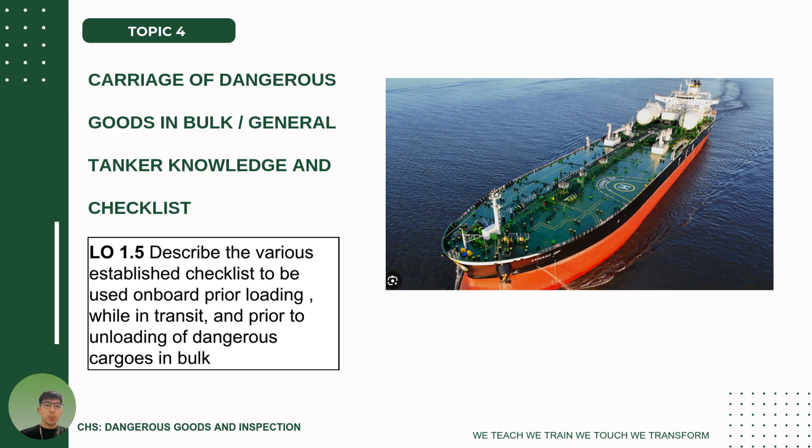So for topic 4, we have the carriage of dangerous goods in bulk, or general cargo tanker knowledge, as well as the checklist.

For general tanker knowledge, as we all know, we have different types of vessels. For each type of vessel, we also have different subcategories. For example, a tanker vessel has its own subcategories - it's not just one single tanker vessel. The types of tanker vessels are listed here.

Before that, we're going to have an overview. A tanker ship is a vessel designed to transport liquid or gas cargo in bulk. Unlike container ships, tankers carry their cargo directly inside large tanks.

Basically, we have a tank inside our vessel. Unlike cargo containers which we carry outside the port and then load onto the vessel, the tanker has built-in tanks on the vessel. These liquids may include crude oil, fuel oil, chemicals, and liquefied gases. Because of the hazardous nature of this cargo, tanker operations require strict safety measures and trained personnel. That's why the salary of seafarers working on tankers is much higher.

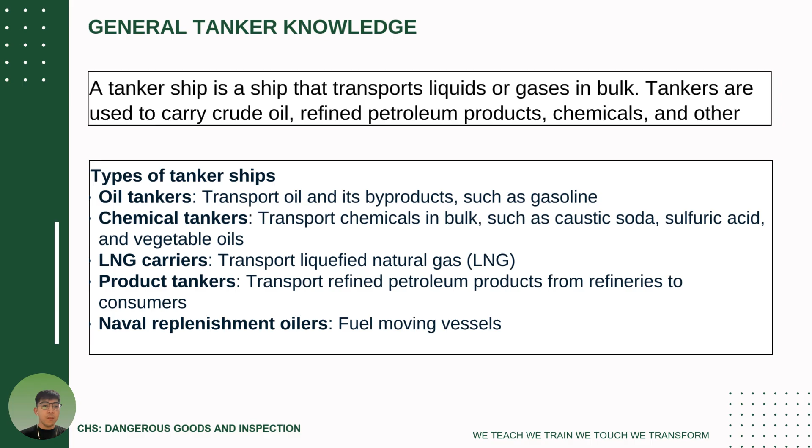Because the risk to lives is higher, and also the trainings required are numerous. So we have oil tankers, which transport oil by-products such as gasoline. We also have chemical tankers, which transport chemicals in bulk such as caustic soda, sulfuric acid, and vegetable oil - meaning chemicals that are mixed. Then we have gas tankers - not only liquefied natural gas, but also liquefied petroleum gas. And we have product tankers, which carry refined petroleum products from refineries to consumers, and naval replenishment oilers for fuel moving vessels.

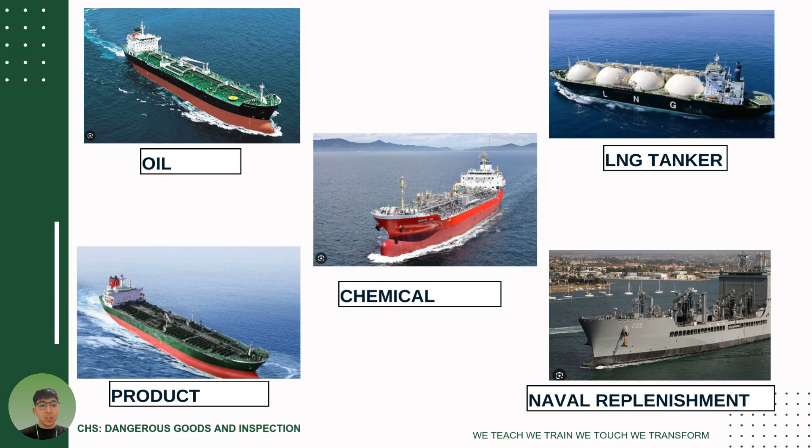They use these pipings, and those pipes are designated to transport cargo from port into our vessel. Then on our vessel, it has built-in containers. That's what we call it - as well as the naval replenishment.

For the terminologies, the first word is sea chest. A sea chest is an opening in the ship's hull. If you notice, there's the ship's hull, and there's an opening in it - that's what we call the sea chest, which allows seawater to enter for cooling. So we use this sea chest to cool down the engine.

So, ballast and firefighting system is protected by a strainer. Why is a strainer installed? To prevent debris.

What are the debris? Things under the sea, like corals and reefs, and marine microorganisms, preventing them from entering inside the hull. Without the sea chest, important systems like engine cooling and fire pumps would not function properly, because they also need a cooling system. This sea chest is the opening for seawater to enter the hull of the vessel.

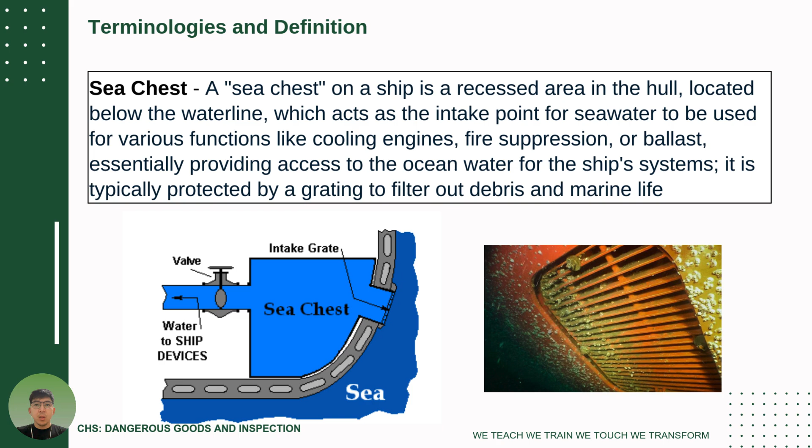Then we have the overboard discharge valve. This allows the water or waste to be discharged from the ship into the sea. This includes the discharge valves from storm valves and overboard globe valves. These valves must always be properly controlled to avoid pollution, and incorrect operation can result in oil spills and/or environmental damage.

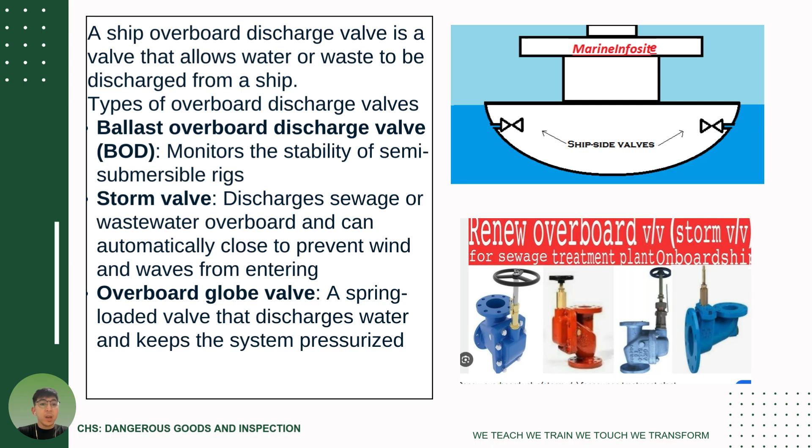Again, these valves are used for opening and closing the switches. You'll see valves like that here in the school, like the ones for the fire hydrants. When you go aboard a ship, especially when you are in a tanker vessel, you'll see many hydrants like that for opening and closing the valves.

Then we have the emergency shutdown device. What is the ESD for? The ESD is a safety system designed to immediately stop the cargo operations.

So when you see something leaking or there's a fire, just press the ESD. In case of emergency, it automatically closes the valves and stops the pumps to prevent spills, fires, or explosion. That's what happens when there's a fire during loading and unloading operations, just press the ESD. And not just fire, but also spills or explosions.

For example, if a cargo hose connected to your vessel coming from the port bursts, you can press the ESD instantly to stop the transfer or stop the operation. Sir, what if there's no advice yet? You don't need to wait for the advice. If you notice that the operation is dangerous because of the accident that happened, just simply press the ESD and inform also the bridge and/or the cargo control, the CCR.

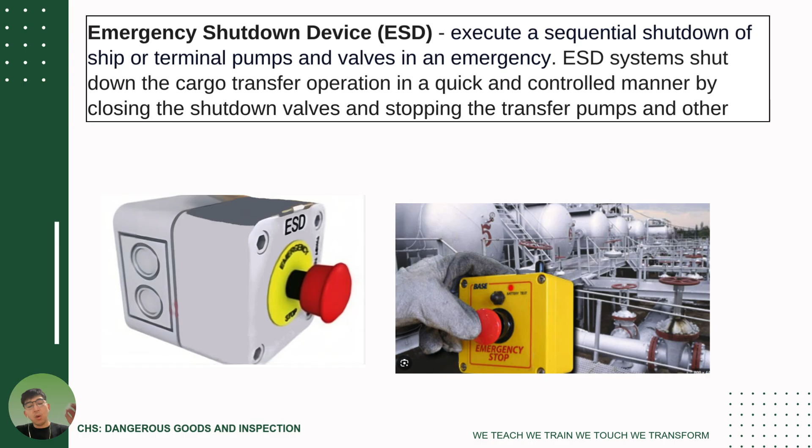That's our main room, the cargo control room. Then we have the tanker manifold valve. What is the tanker manifold valve? When we say manifold, it is the place where the transferring happens.

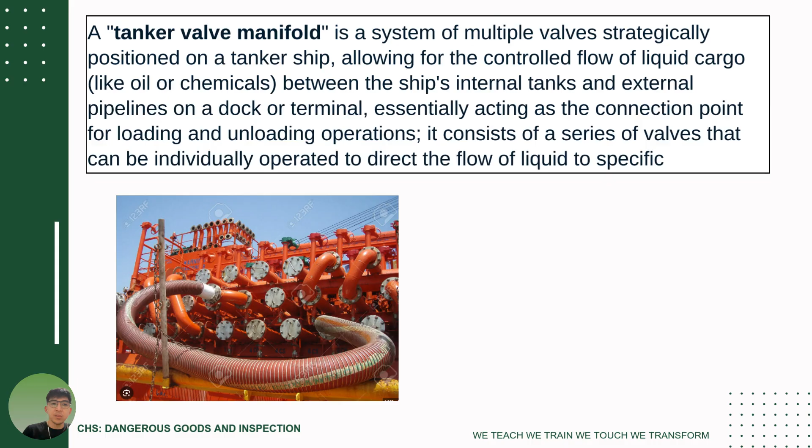Then we have the mast riser. The mast riser controls the vapor pressure inside the cargo tanks. It prevents overpressure and allows the controlled release of vapor.

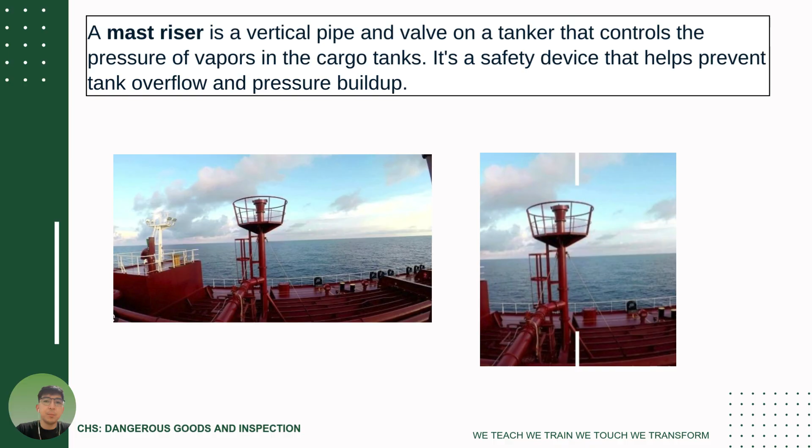Then we have the emergency firewire. We also call this the emergency towing-off pennant. It allows tugboats to quickly pull the vessel away from the port in case of fire or explosion. This is a vital safety feature to prevent fire spread and major port damage.

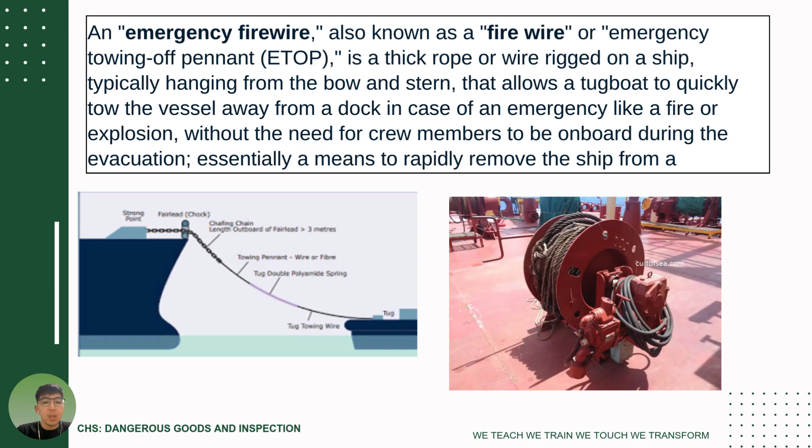Then there's the pilot ladder. I know we're familiar with the pilot ladder - these are the things or equipment that we use on board ship when we're having an operation. You may have studied this already, but you may not know exactly where it should be used.

Again, all these things we're mentioning are used during loading and unloading operations, including the pilot ladder. As we all know, the pilot ladder is used for safe boarding and disembarking of pilots. It must meet international safety standards. A proper rig of the pilot ladder prevents accidents and ensures safe transfer of pilots on board - we can't dock at port without a pilot. So the pilot ladder is also included in loading and unloading operations.

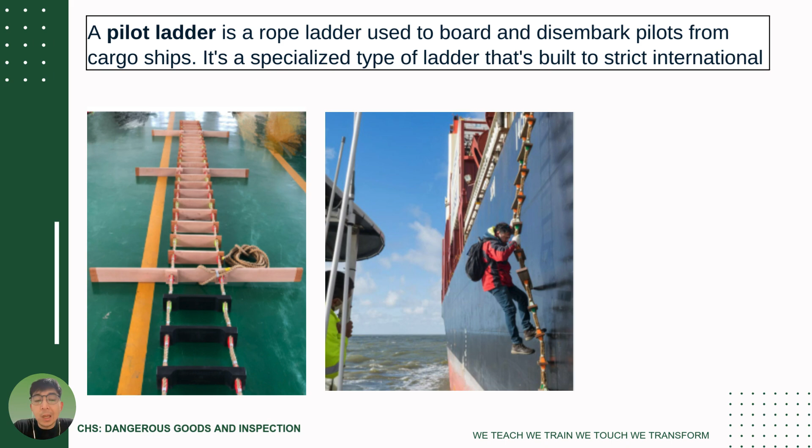Then we have the crude oil washing system. Crude oil washing is a system that cleans cargo tanks using crude oil itself and it removes the residue.

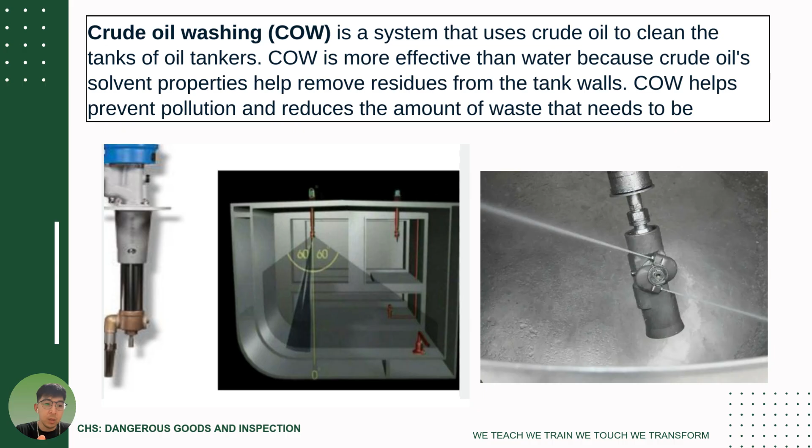So COW also helps to minimize the amount of oil waste that must be disposed into the sea. So that's the purpose of crude oil washing.

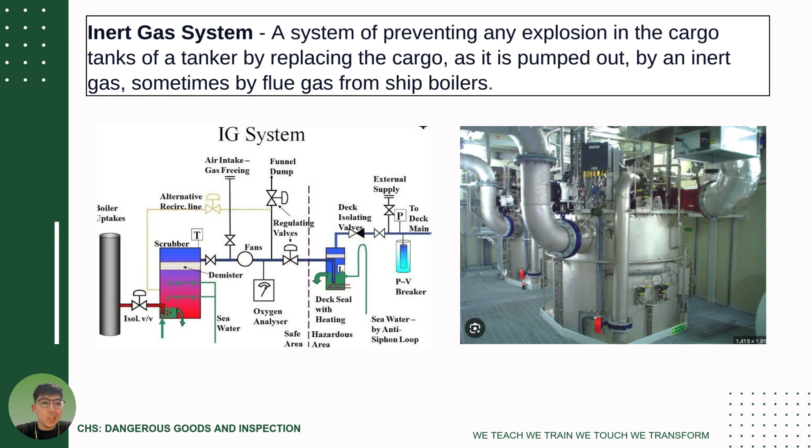Then we also have what's called inert gas, or IG. Inert gas prevents explosions inside the cargo tanks. It reduces the oxygen concentration below the level needed for combustion. Without this system, cargo tanks could easily ignite and explode. That's the main purpose of inert gas.

Then there's the loading arm, which you can see at the port. You connect the loading arm to your manifold. Sometimes the loading arm doesn't fit properly onto the manifold, so you use a reducer, which connects to the loading arm. Sometimes a hose is used instead. The loading arm is a mechanical device connecting the ship to the shore pipeline, allowing safe and flexible transfer of liquid cargo or gas.

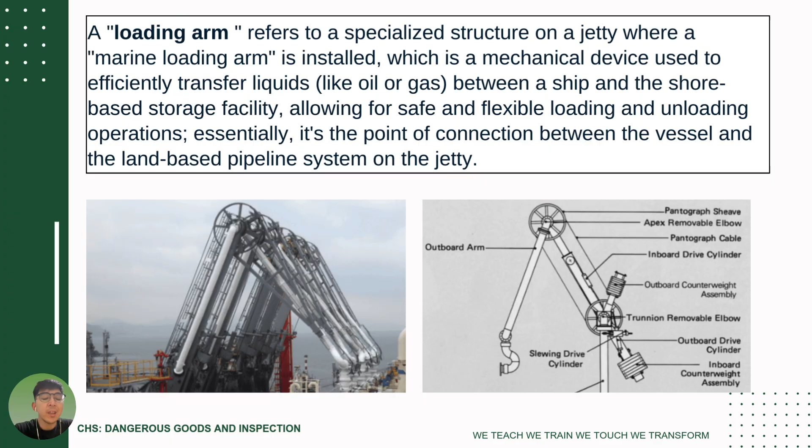Loading arms are designed to adjust to the ship's movement due to tides and waves. Once you're on board, you'll realize why tides and waves matter - when you load oil onto your vessel, it tends to get heavier. But even if the vessel gets heavier, during high tide it will still rise. So the loading arm is designed to adjust if the height of the vessel changes, or if there's a difference at the connection point, because it could break if it were fixed in place. What you need to do is always check if the loading arm is properly aligned with your vessel, make sure your mooring lines stay intact, and monitor whether the loading arm remains aligned with your reducer.

Then we have the drip tray. In a tanker vessel, the drip tray collects leaks and spills from the cargo connections. You'll see it at the bottom of the manifold, the square piece where things drip down. The drip tray prevents pollution, protects the ship's structure, and improves housekeeping on board. The collected liquid must be properly disposed of according to pollution regulations, so everything that drips from the pipelines falls there, so it's caught and doesn't go directly onto the deck or into the sea.

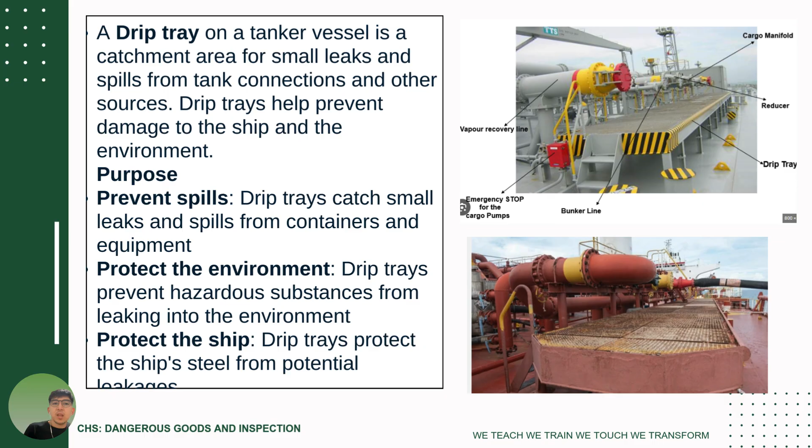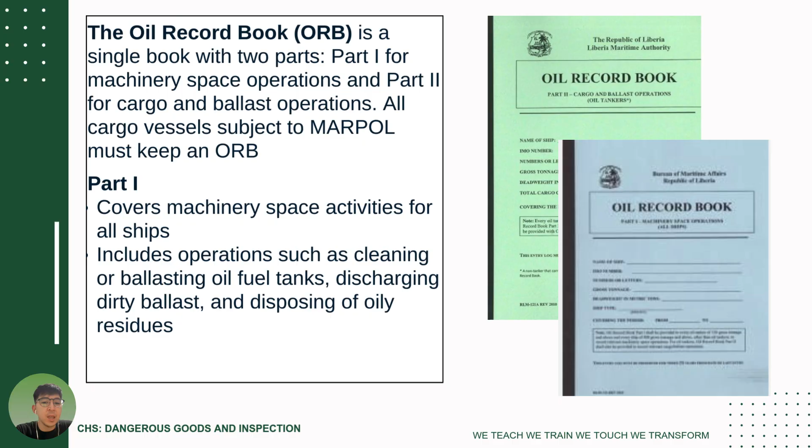Then we have what's called the oil record book. The oil record book tracks machinery space operations such as bilge discharge, fuel tank cleaning, and sludge disposal. All ships above 400 gross tonnage must maintain the oil record book for accurate entries and to help ensure MARPOL compliance. So everything you load onto your vessel should be recorded in the oil record book - when it happened, what quantity, when it commenced, when it ended, and what kind of oil it was. All of that should be indicated in our ORB.

Then we have the pressure vacuum valve. The pressure vacuum valve protects the cargo tanks from excessive pressure or vacuum. It automatically releases vapors or takes in air to maintain a safe pressure level. It also prevents tank deformation or rupture.

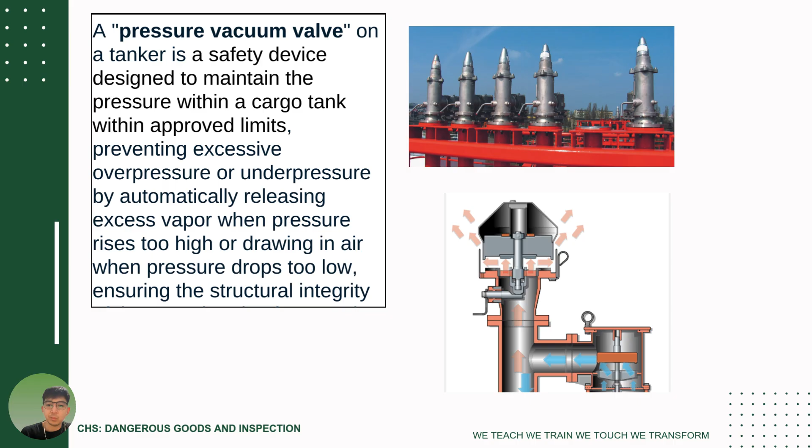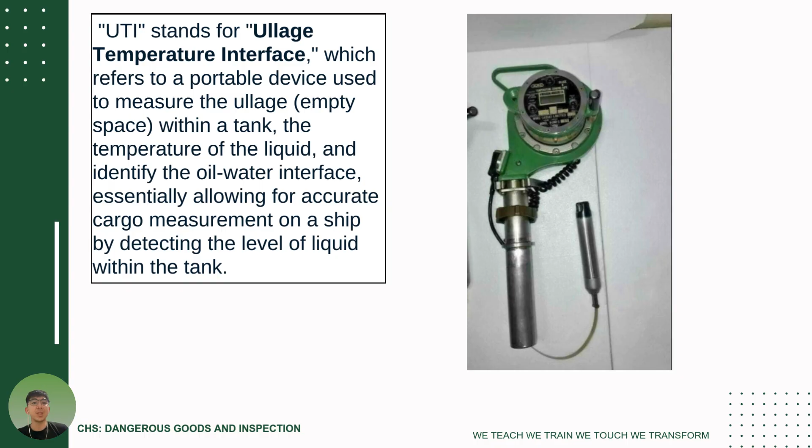Kung ilan yung empty space sa loob ng tangke, we are using the ullage temperature interface. Then we have the cargo sampler device.

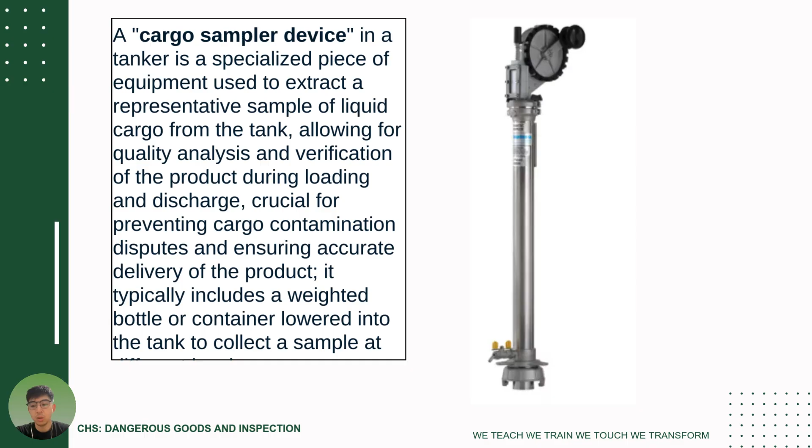Ano nga ba yung checklist na tinatawag natin? So ito yung checklist, no? It is done before loading operation, bago kayo mag-commence ng loading operation. So other checks include verifying cargo compatibility, tank atmosphere testing, checking the inert gas, inspection of the hoses, the loading arms, confirming emergency procedures to shore personnel.

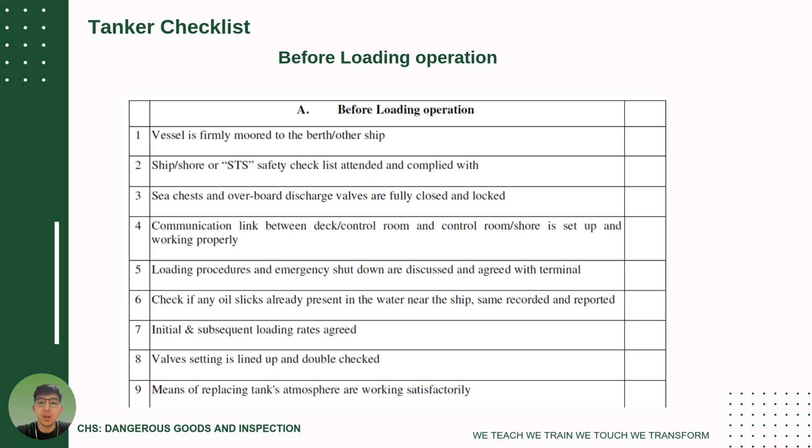Then meron din tayong continuous monitoring na required, no? Crew must observe tank levels, pressure, and flow rates, with terminal personnel also essential to avoid overfilling and accidents.

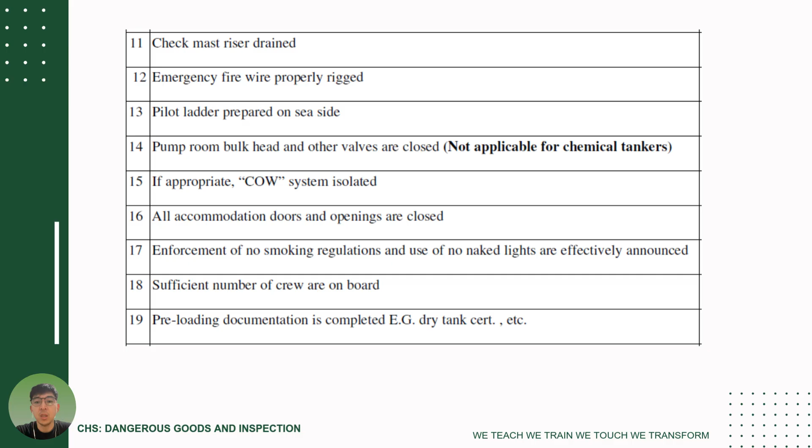And also for the loading operation, no, crew should maintain constant watch. Sabi ko nga lagi niyong i-che-check yung mooring lines, also ensure the emergency equipment is standby, no? Kasi hindi niyo alam kung kailan yung emergency, so kailangan naka-standby siya. And any abnormal situation must be reported immediately to the CCR, the cargo control room, or to the officer in charge.

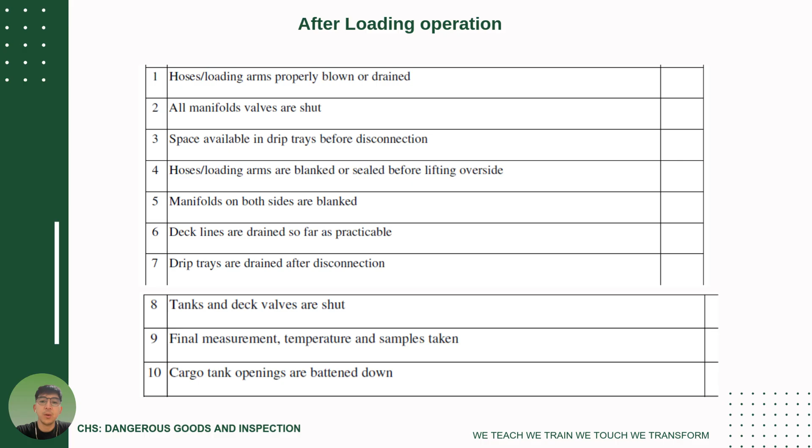So pagdating naman sa loading operation, after loading operation naman, crew should inspect for leaks and ensure cargo systems are secured, update the oil record book, and prepare the ship for safe transit, and for the final safety checks to ensure no hazard remains on board.

So to conclude our topic, no, dangerous goods in bulk requires a high level of knowledge, discipline, and strict adherence to safety procedures. It can cause serious harm to human health, property, and the marine environment if not managed properly. So understanding the tank types, key equipment, and essential terminologies equip seafarers. Meanwhile, the use of standardized checklists before, during, or after the loading operation is important.

So meron tayong mga takeaways dito sa ating presentation, no? Again, tanker ships carry highly dangerous cargo, so strict safety procedures must be followed, and we have different types of tankers that carry different cargos, each requiring specialized handling and safety systems. Key tanker equipment such as emergency shutdown device, inert gas, pressure vacuum valves, and manifold play a vital role in preventing accidents. So meron din tayong checklist before and after the loading, and essential tools to use help prevent spills, fires, and explosion.

Again, kailangan din natin ng proper documentation, no? Especially the oil record book, and ensure compliance with international maritime regulations. So every crew member is responsible for safety, not just the officer, no? So teamwork, kailangan ng teamwork dito, and discipline are critical.